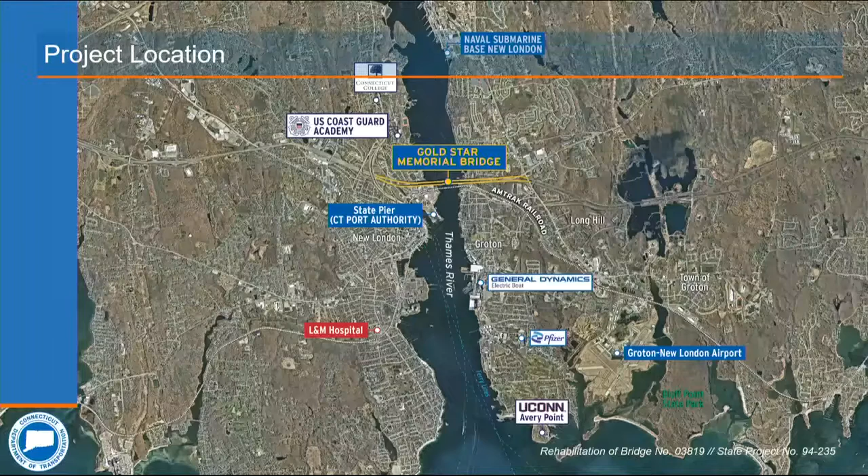Good evening, everyone. Can everyone hear me okay?

Good evening. My name is Emma Covington-Harbron, and I am the project manager from HNTB for the Northbound Gold Star Rehabilitation Project. As many of you are aware, the Northbound Gold Star Bridge carries I-95 northbound traffic between New London and Groton. Along with the southbound bridge, the Gold Star bridges are the only bridges in this area and are a vital link in this northeast corridor, connecting interstate traffic as well as regional traffic within Connecticut and between the two local towns. On the northbound bridge, exit 85 provides access to the town of Groton and points south towards Pfizer, Electric Boat, the University of Connecticut at Avery Point, and the Groton New London Airport. US Route 1 combines with I-95 northbound over the bridge, and also diverges at this exit.

Just past the bridge, exit 86 connects to Route 184 and Route 12 and provides access to the US Naval Base. From the southbound bridge, exit 84 provides access to Route 32 and the city of New London, and to the north provides access to the US Coast Guard Academy and Connecticut College, and to the south, L&M Hospital and State Pier.

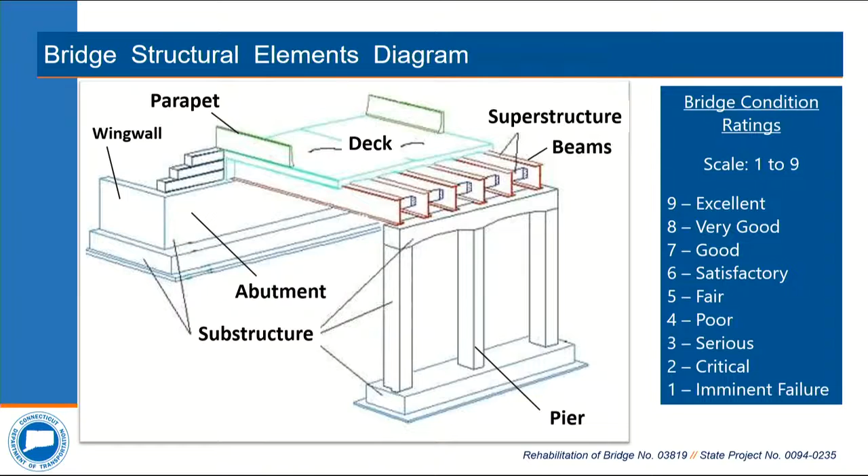Based on the most recent inspection report for the northbound bridge, the existing deck has a condition rating of 4, or poor. This deck was reconstructed in 1975, but given its current condition, it's definitely reached the end of its current service life. In addition, the existing parapet on the bridge, those elements that keep us on the bridge...

...is a 32-inch reinforced concrete parapet with an aluminum fence. This existing parapet is not currently crash tested, and the aluminum fence connected to the parapet is often damaged and is quite difficult to repair. So the parapet and the existing fence will also be replaced.

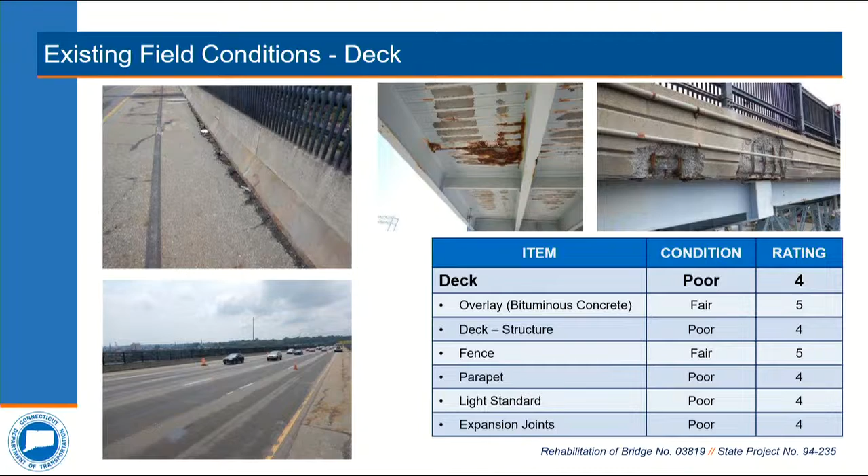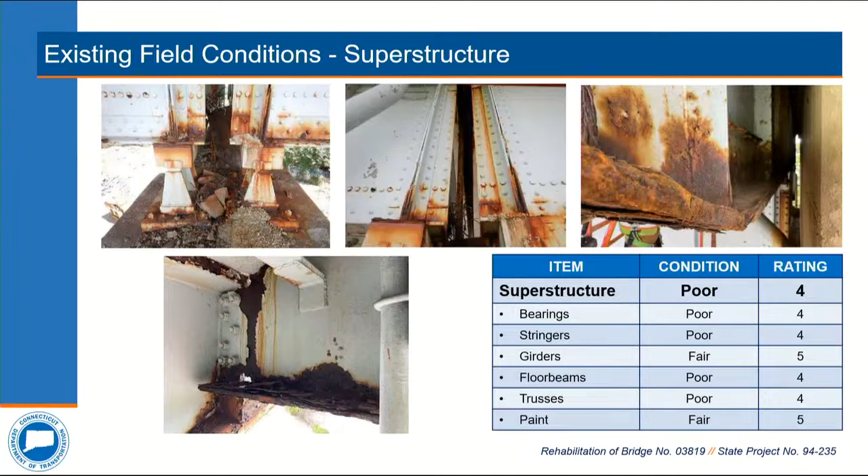The structure will also be repainted as well. That's a big one.

The existing substructure units are original to the bridge construction, so those are also 1940s construction, and they're mainly comprised of two reinforced concrete columns with a cap connecting the tops. They have a condition rating of fair, or 5, and they are subject to minor repairs such as patching.

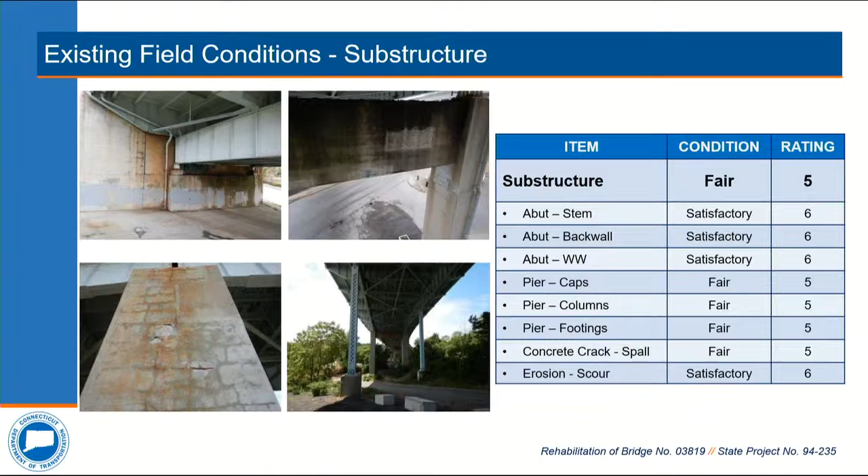The existing substructures are also considered in good enough condition to support or accommodate the steel strengthening and deck replacement work that we'll be doing to extend the life of the bridge, provided that it receives consistent maintenance through the next years of this bridge's life.

So just to quickly summarize the rehabilitation work we'll be performing on this bridge: we'll be strengthening and repairing the structural steel elements in the girder spans of this long structure. We'll be replacing all the bearings in the girder spans and select bearings in the truss spans. We will be doing a full deck replacement, from abutment to abutment, the full length of the bridge. We'll be replacing the deck and all the deck joints.

We will be replacing the existing parapet and aluminum fence with a MASH-compliant 3-rail steel barrier and a stainless steel mesh fence. A MASH-compliant barrier is one that has been rigorously tested to FHWA standards, and it provides superior safety to the bridge.

We will also be doing a full superstructure painting on the bridge. We'll be replacing all the concrete approach slabs, the areas before you get on the bridge. We'll be repairing the concrete substructures, doing that patching work we were talking about, and we'll be installing new light standards and support framing for those, and new overhead sign structures for traffic.

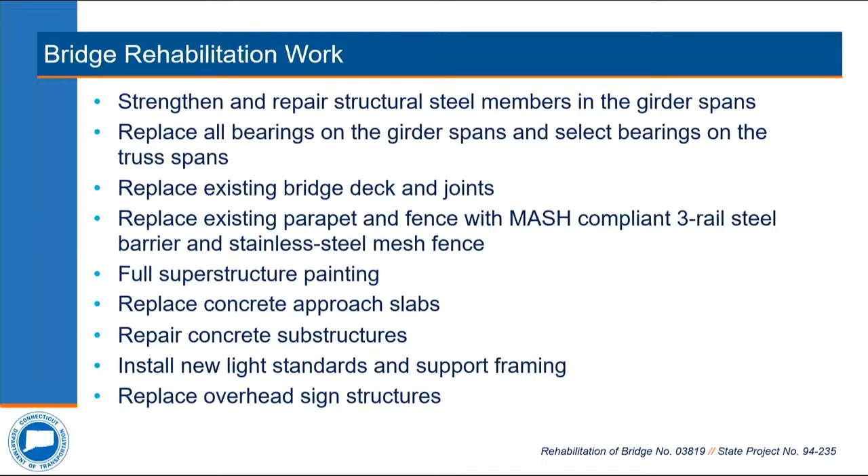I'll now walk you through our proposed construction staging for the rehabilitation work. The construction staging is mainly divided into 2 main stages.

The first construction stage will divert two lanes of I-95 northbound traffic to the southbound bridge, which my colleague Mr. Schweitzer will go into more detail in a few moments. Then 2 lanes of traffic will be diverted to the center of the existing northbound bridge. By diverting those 2 lanes of traffic to the center, it will allow us to start our deck demolition work.

So we'll remove the deck on the north side and the south side of the bridges. Before doing any deck demolition work, we'll make sure that debris shielding is installed to safeguard any structures or any roads that are beneath the structure.

Once the existing deck on the north and south side is removed, we'll then install all our steel strengthening measures to increase the structural capacity of the bridge.

Once the steel strengthening has been installed or the repairs have been installed, we'll then install our new deck through the length of the north and south sides of the bridge, and that will complete our stage 1 work.

When we then go to construction stage 2, we will shift those 2 lanes of traffic from the center of the bridge to the south side of the bridge on our newly reconstructed deck, and we will then demolish the existing deck along the center of the bridge and replace it with our new bridge deck.

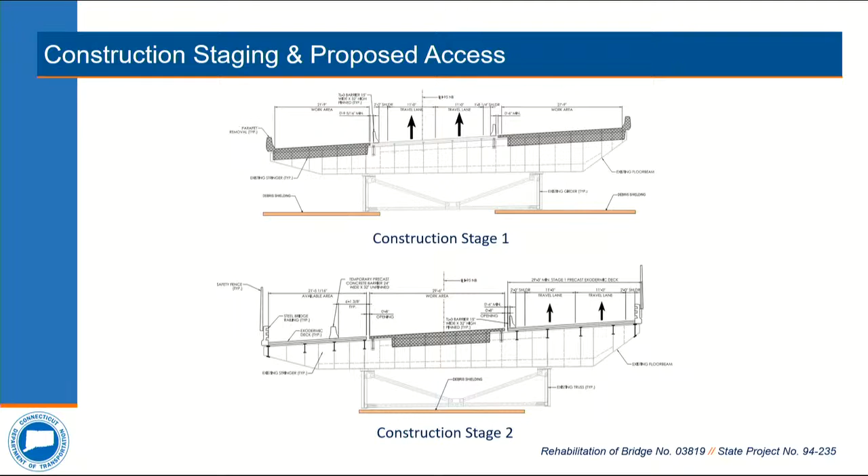And again, debris shielding will be installed throughout the full length of the bridge to safeguard any roads and structures beneath the northbound bridge.

We will do our deck demolition there, on the north and south sides of the bridge, and we'll perform our strengthening measures in those spans first. These spans are primarily the land-based spans, and it's also where most of the structural strengthening work will be happening, so we want to make sure that we get that work taken care of first.

After the deck demo, to complete this work efficiently, we're looking at 4 crews working simultaneously. So if you think about how we divide this work, it's the north and south side of the bridges on the west, and then the north and south sides of the bridges on the east. It's having a crew in each of those areas, so divided into 4 sections.

After the stage 1 deck demolition and steel strengthening is performed, we'll then install the new deck along these same spans. We also anticipate 4 crews working simultaneously there so that we complete this work in the most efficient manner.

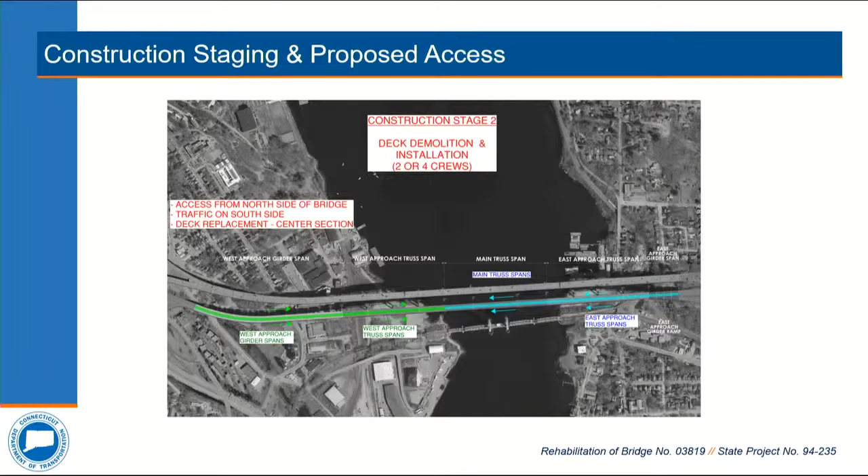We'll have the north side of the bridge, which also has that newly constructed deck that we did in stage 1, to provide construction access. So we hope that the deck demolition and deck replacement along the center of the bridge will go quicker.

We think either 2 or 4 crews could be used to do this work. Either 1 crew working from each end of the bridge and then working towards the middle, or having 4 crews, 1 at each end and then 2 starting the middle and then working towards each other, so that we can complete this deck demolition and deck replacement in a timely manner.

And with that, I will turn it over to my colleague, Mr. Schweitzer.

To the screen, and I'll point as I'm explaining because there's a lot going on here. As was explained, there's a very vital link, both locally, statewide, and regional. So it's important to understand some of the existing conditions out there that help us determine the best and most efficient way to build this bridge and maintain traffic.

Now I-95 is highlighted by the 2 blue lines here. This green dashed line in the center represents the crossover we are proposing, that 2-lane northbound crossover. If you look at the northbound direction, I-95 northbound widens to 3 lanes as it approaches the bridge. Traffic from Route 32 southbound, which also carries US 1, plus local traffic from New London, forms a lane add onto the bridge. That forms the fourth lane, while Route 32 northbound traffic, along with Huntington Street, forms the fifth lane. So we have 5 lanes going across the northbound bridge.

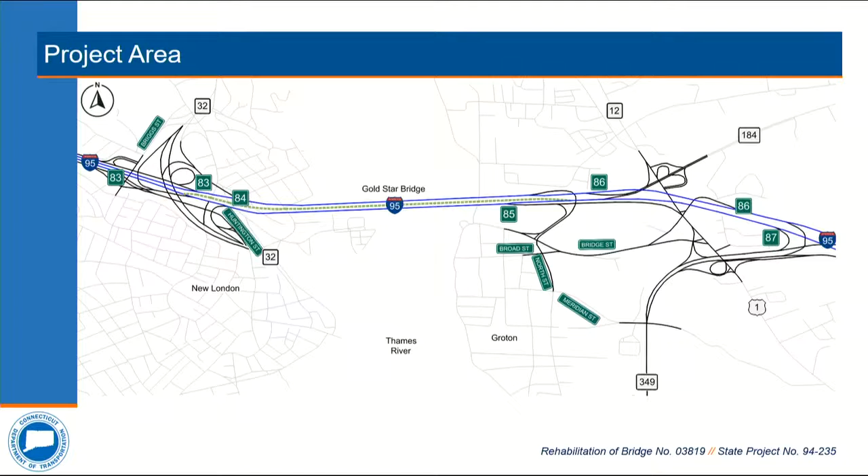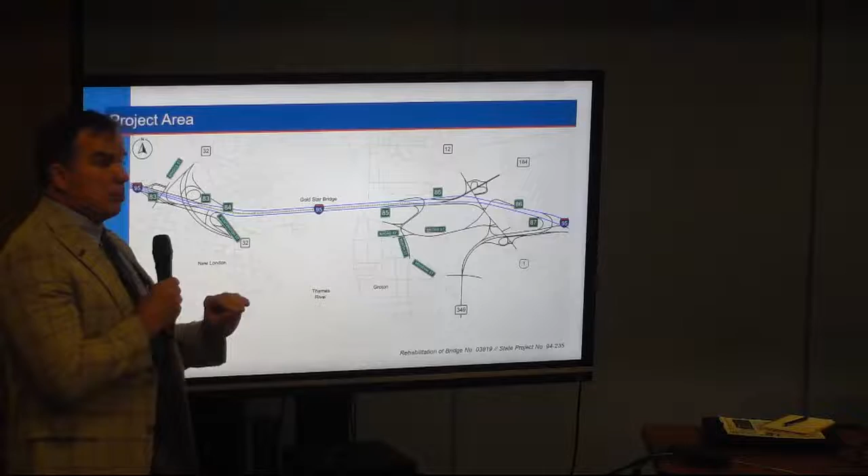On the departure side, exit 85 is a right-hand lane drop that is on the structure. About 1,500 feet off of this is exit 86 to Route 184, Route 12, and points north, which is a left-hand lane drop. What's important to note is that these two lane adds account for about 40% of the traffic on the existing northbound bridge, and exit 85 and exit 86 take about 40% of that traffic off the bridge. So this really is a local connector to get from New London to Groton.

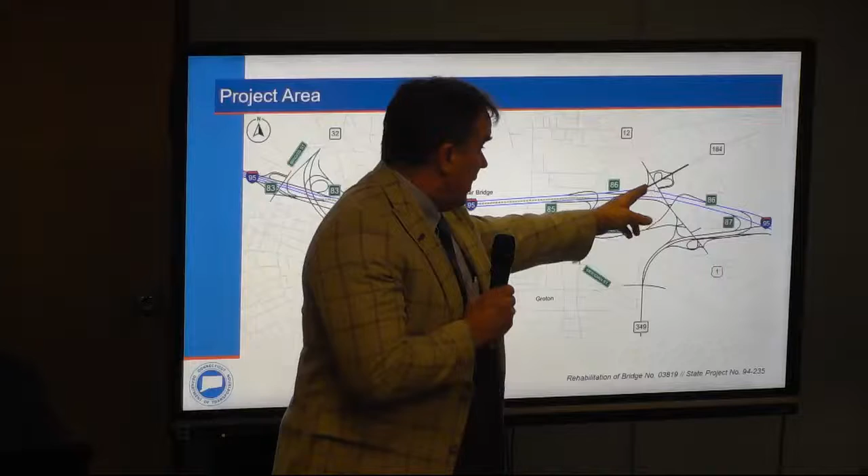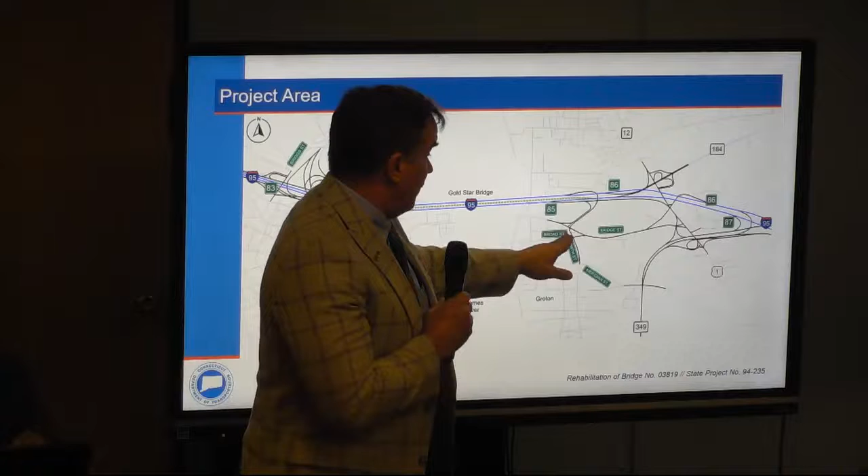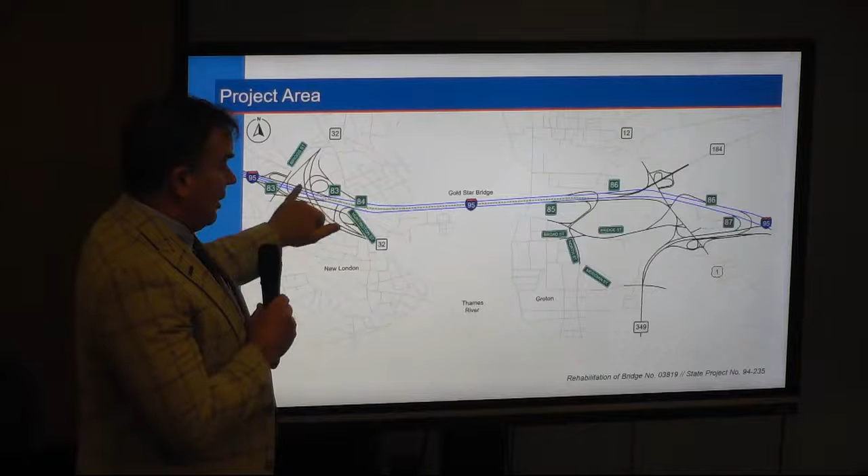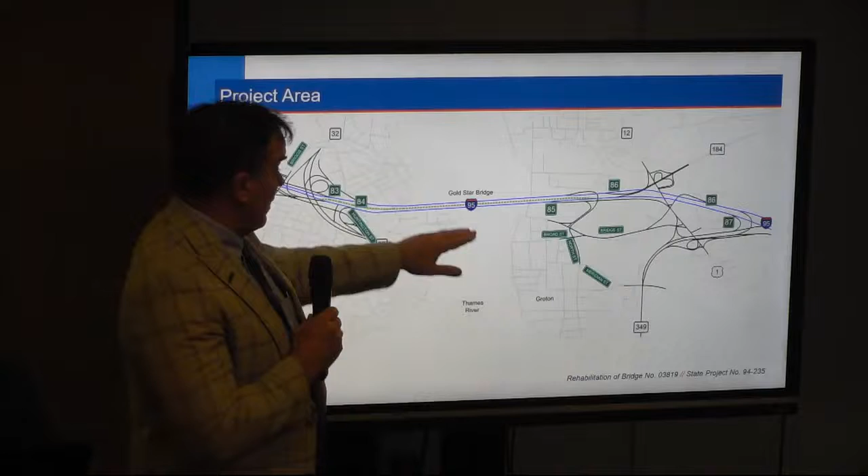On the southbound side, I-95 southbound approaches the Gold Star Bridge with 3 lanes. Exit 86 is a left-hand lane add, giving us 4 lanes, while exit 85, the ramp from Bridge Street and downtown Groton, comes on as 2 lanes but quickly merges to 1. So again we have 5 lanes for a good majority of the southbound bridge, where exit 84 becomes a right-hand lane drop going to Route 32, and exit 83, to the frontage roads and US 1, is also a right-hand lane drop. These 2 exits add just a little less than 40% of the traffic on the bridge, while these 2 exits on the departure side take a little greater than 40% of the traffic off the bridge.

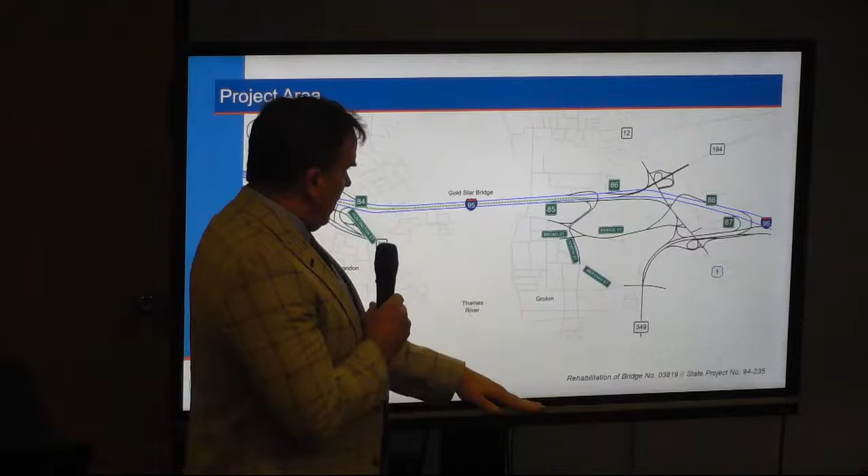Can we go to the next slide, please? So if you look at what we have, at the top are existing conditions, with southbound on the left side and northbound on the right. We're showing something fairly similar, where we have 10-foot left and right shoulders with 5 12-foot travel lanes.

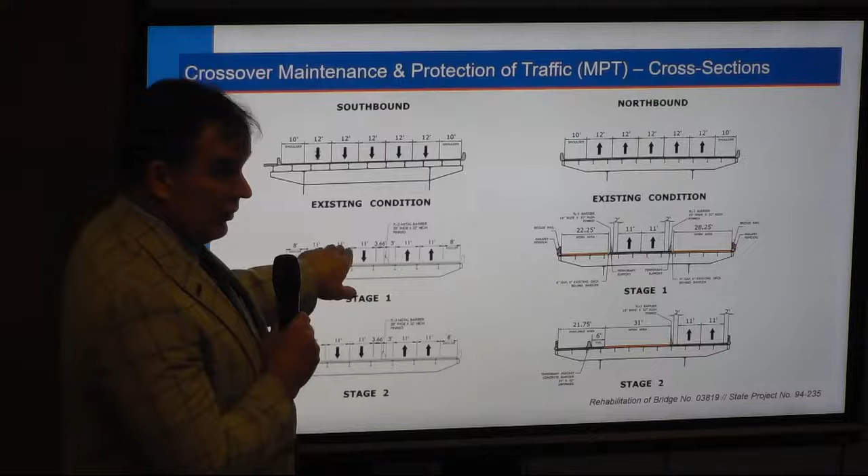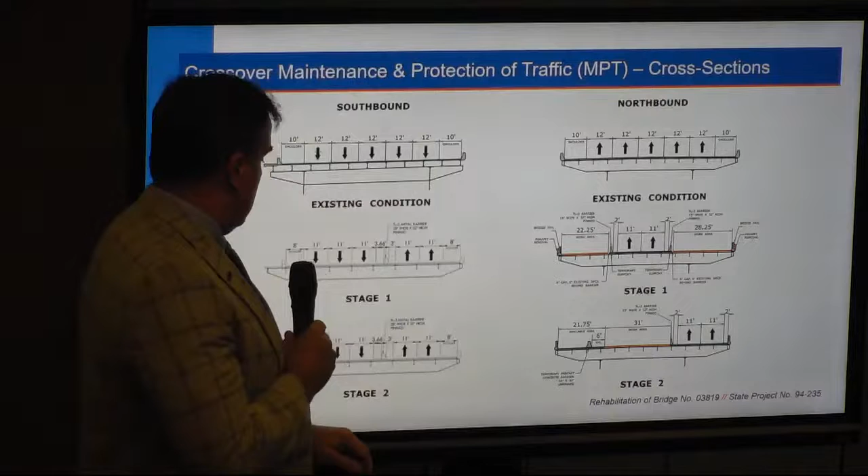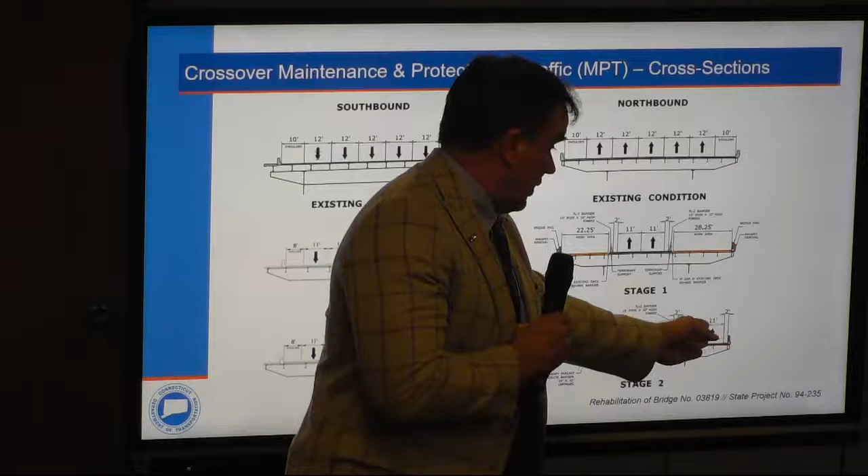What we're looking to do, as was explained, is take 2 lanes of that I-95 northbound traffic and put it onto the southbound bridge. Southbound traffic will be reduced to 3 through lanes. In stage 1, we'll be carrying traffic in the center of the bridge while we work on both outsides. Stage 1 and stage 2 are consistent, we won't be changing any traffic on the southbound bridge. On the northbound bridge, we'll be moving those 2 lanes to the southbound side while the center portion of the bridge is reconstructed.

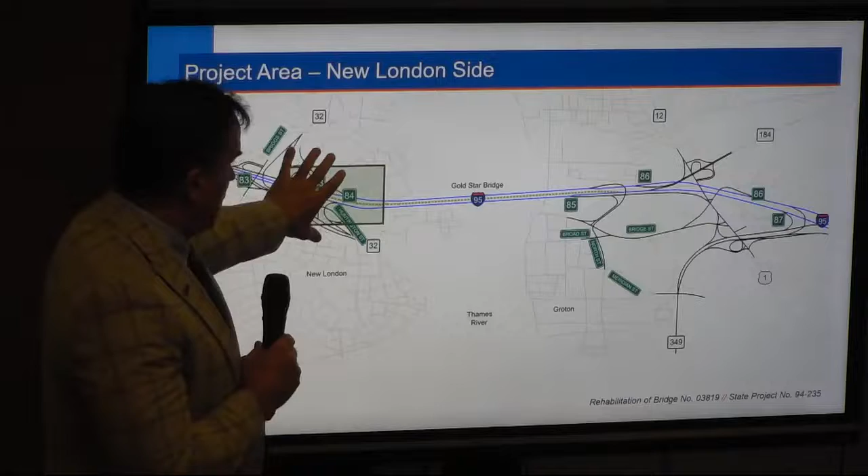So if we look at this, we can get a blow-up of both the approach and departure side. We'll look at the New London side first.

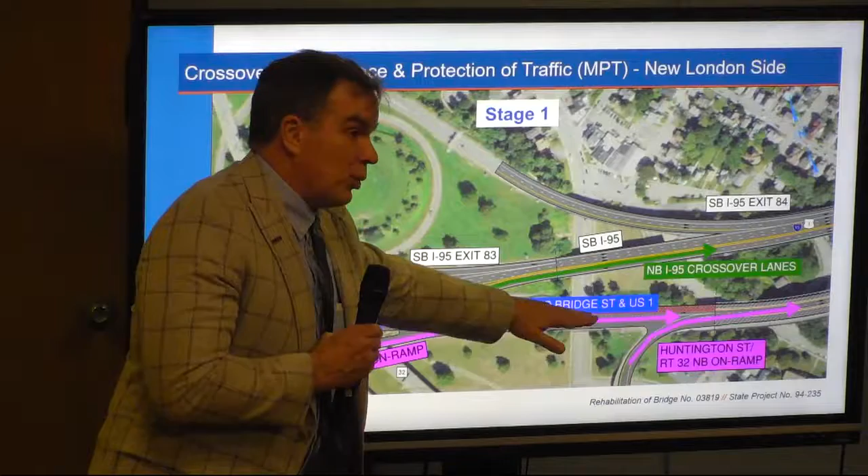So what we have here shows Route 32 running diagonal on the left side, 95 southbound to the top, 95 northbound to the bottom of this screen. These 2 lanes, represented by the green, will be the northbound lanes that cross over. Half a mile to the west, I-95 northbound is only 2 lanes; it widens out to 3. We will not allow that 3rd lane to develop.

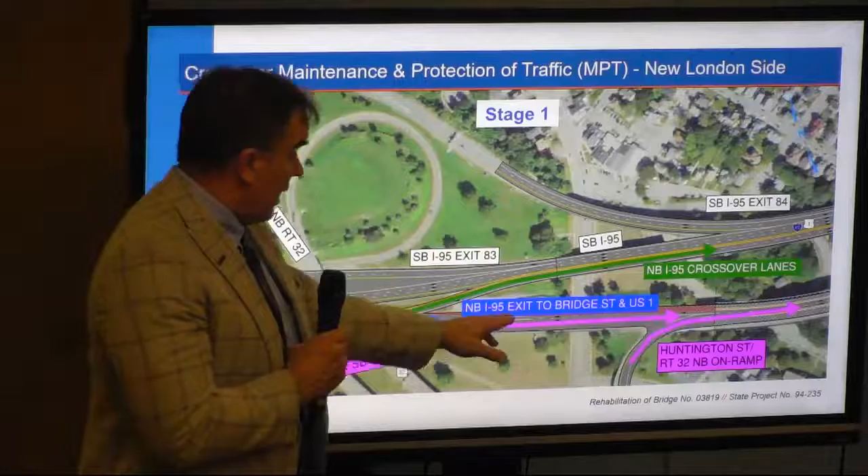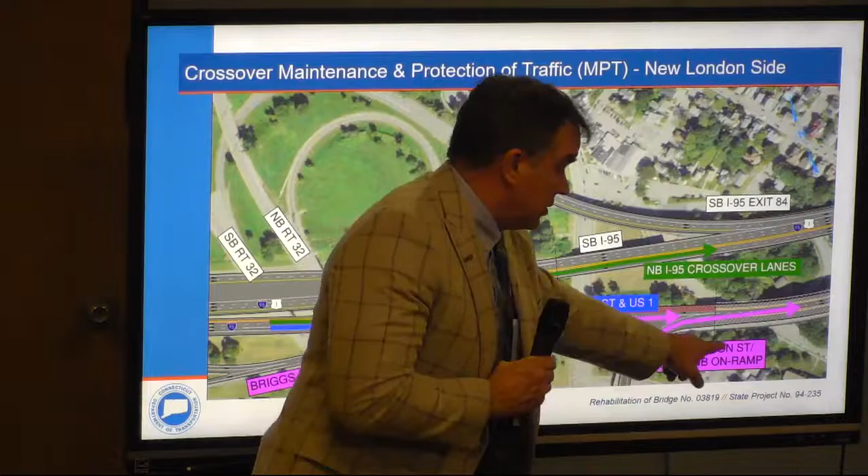So we'll take those 2 lanes of the 95 northbound traffic and put them onto the southbound bridge. We'll provide a slip ramp for 95 northbound traffic that wants to access Bridge Street or US 1, to get to exit 85. The traffic that comes from Route 32 southbound, plus the Briggs Street on-ramp, plus US 1, will merge with this slip ramp traffic and form one of the lanes on the existing northbound bridge. The 2nd lane on the bridge will be formed from Route 32 northbound plus Huntington Street.

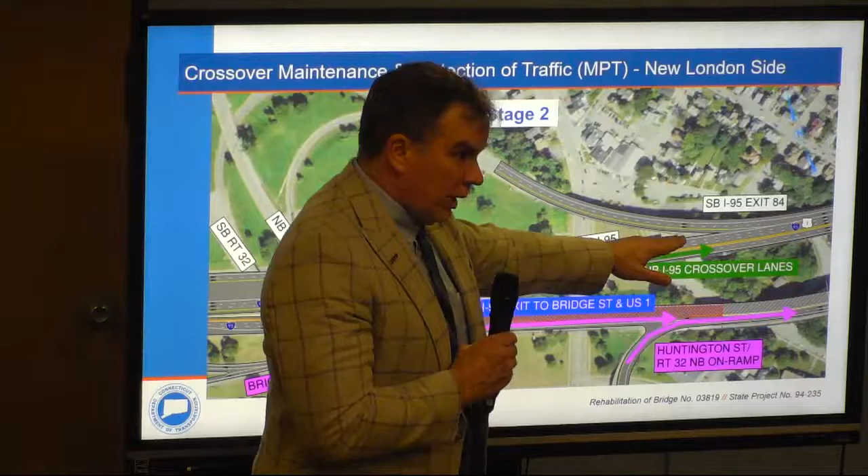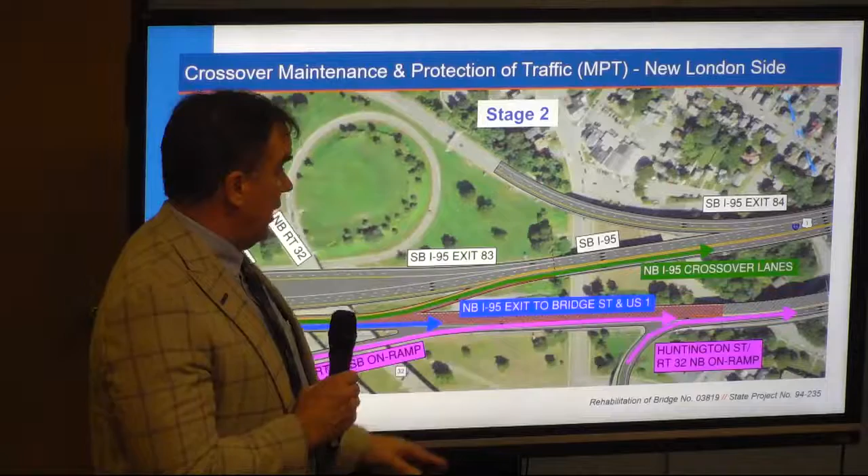So as we look at stage 2, you can see we still have those 2 lanes crossing over to northbound, while we have that one slip ramp coming on to get to exit 85. Our access from Route 32, both southbound and northbound, remains the same, but our traffic has now shifted to the south side of the bridge, while everything remains the same on the southbound bridge.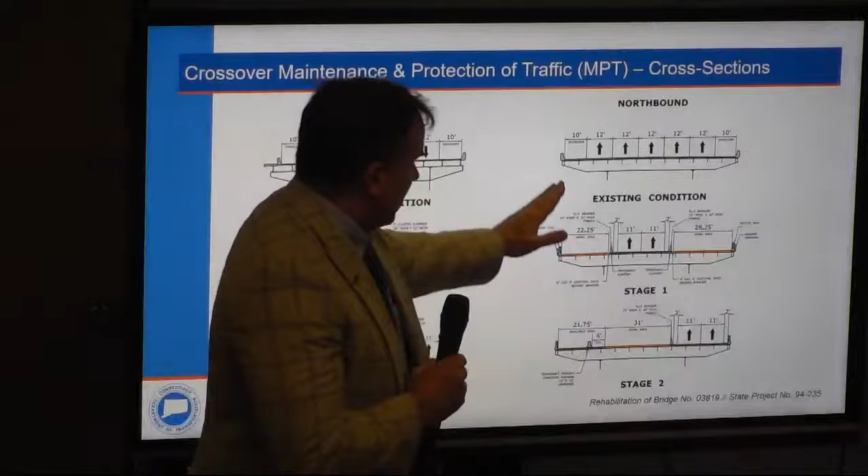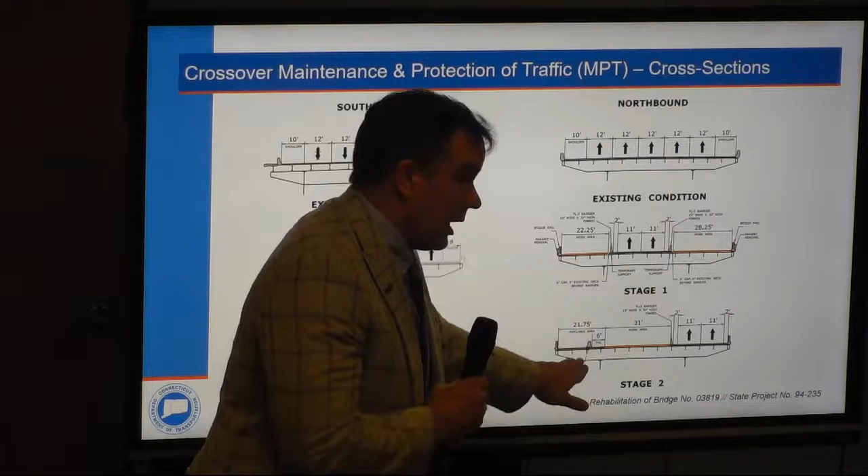This is stage 1. We're working on both sides, driving in the center. Stage 2, we're working in the center, with contractor access to the north side and 2 lanes on the south side.

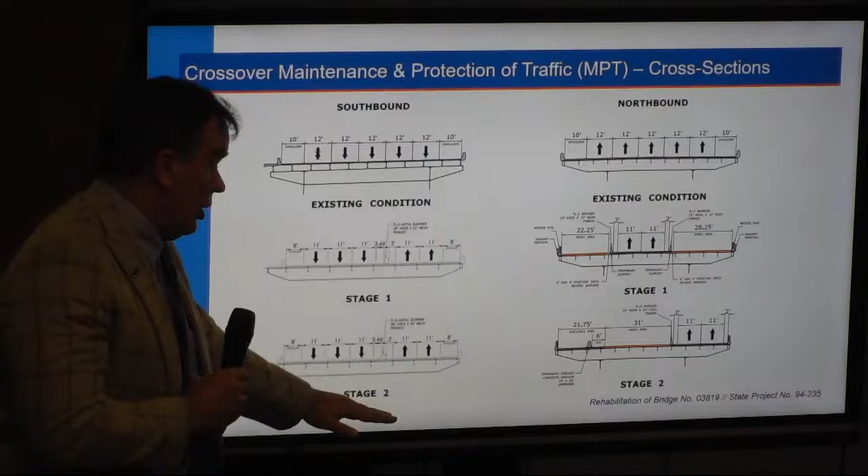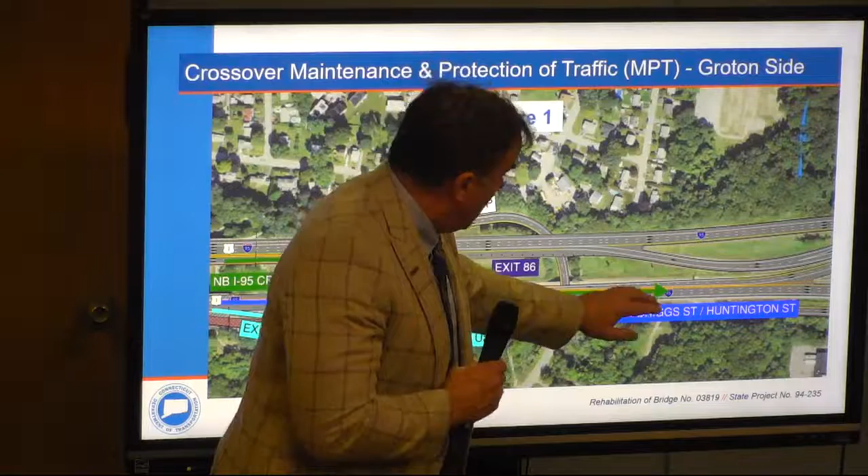Crossover has 2 lanes northbound with 3 southbound, and we remain consistent between stage 1 and stage 2. Now we'll look at the departure side, or the Groton side. This blow up shows the green line, which is the 2 lanes of the northbound crossover coming back onto the northbound, forming the left and center lanes on existing I-95.

Off of this crossover will be the access to exit 86, that left-hand lane drop that goes up to Route 184 and Route 12. That will come off of the crossover.

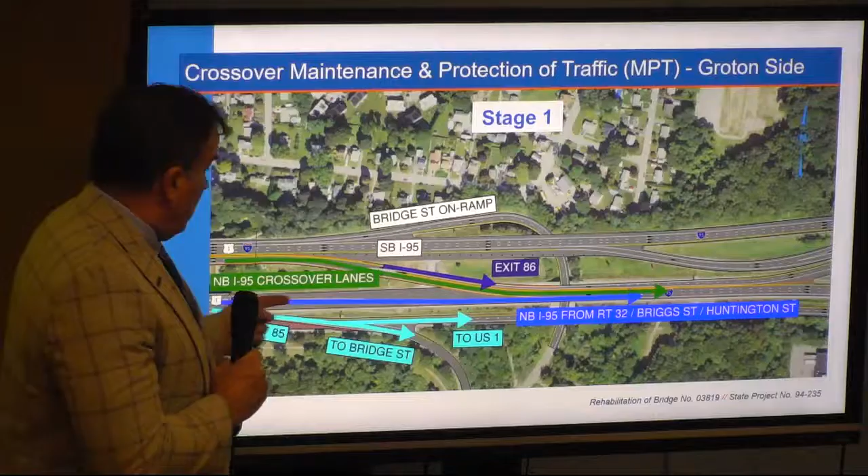On the existing bridge, we have the 2 lanes that will split. One will carry through, so traffic from Route 32 or from downtown New London will have access to I-95 northbound, while the second lane that was on the existing northbound bridge will provide access to exit 85, to both Bridge Street and US 1.

Can you go to the next slide? An important point about this access to exit 85 is that it departs on the bridge, and here is the end of our bridge.

So in stage 1, we're showing it carrying out before we split. We'll build a temporary off-ramp here so we can still access US 1 and Bridge Street while maintaining continuing access to I-95 northbound.

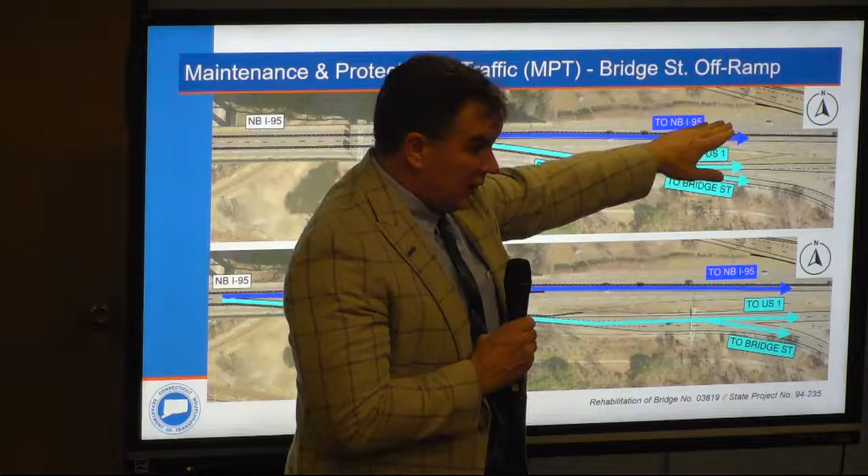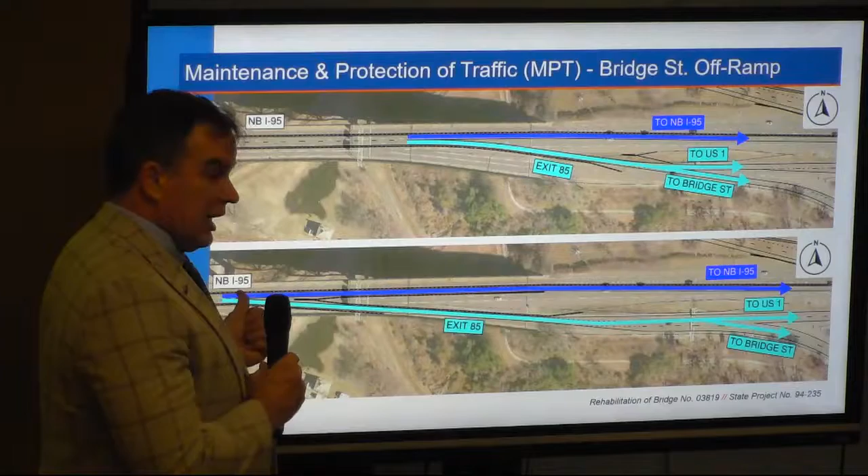But then we want to substage this. So when we're in this stage, we can build this portion of the bridge down in here, as Ms. Heilbronn was explaining. Then we can substage this, so we can exit that traffic off here. We'll move it back — here's the end of our bridge, so we're pushing that diverge point back. We'll still have access to 95 northbound, and then we'll be able to diverge off to exit 85.

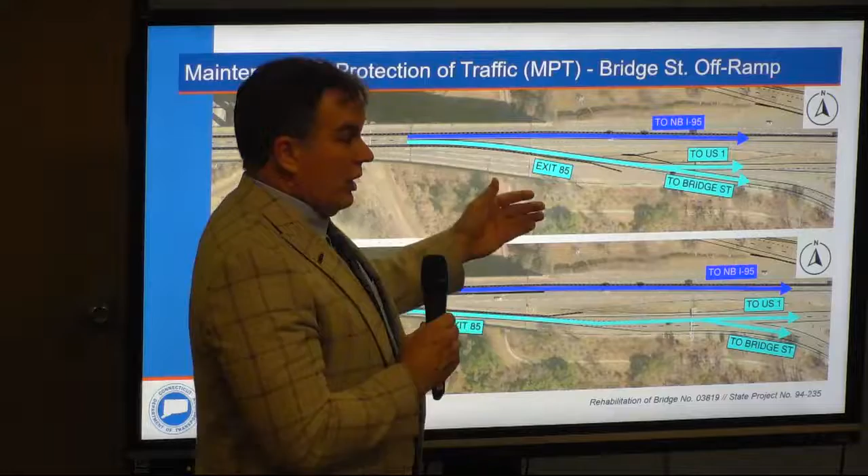What this allows us to do is really limit the amount of closures we need to get to Bridge Street. Because if we were to put in a temporary ramp with that sharp curvature, we'd have trouble making that ramp work. So this substaging really helps us out.

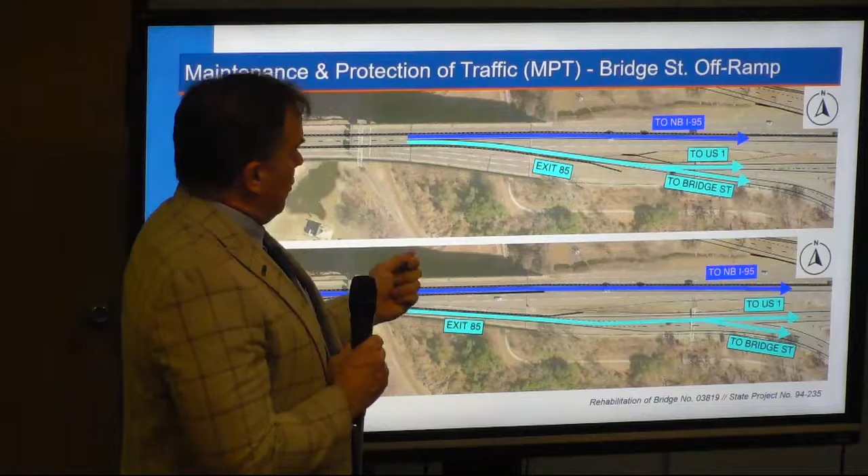Now if we go forward, Shannon — sorry, I keep saying that — let's look at what stage 2 is going to look like. Now we have the traffic on the south side of the bridge, so this ramp will be able to split with access to 95 into Bridge Street and US 1 on the right.

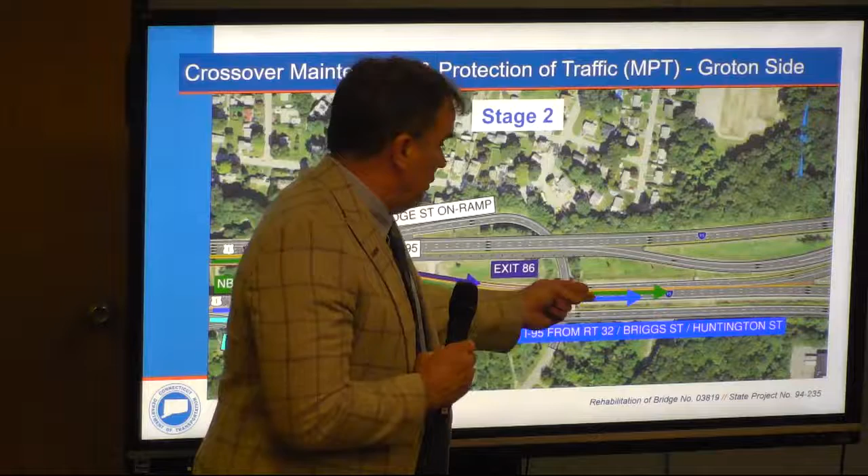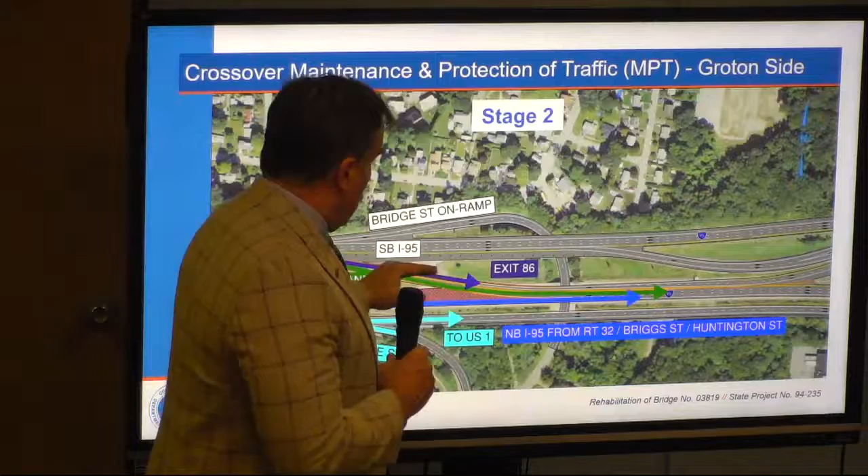These 2 lanes will cross over still, so we'll still form back the 3 lanes with the 2 lanes crossing back over, and this right lane, or the blue line access from the northbound bridge, forming the right lane. This left exit will still come off to provide access up to 184 and Route 12.

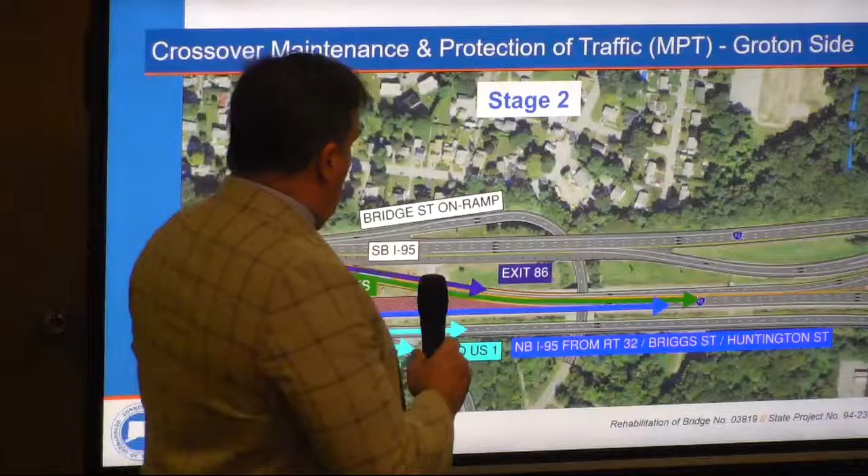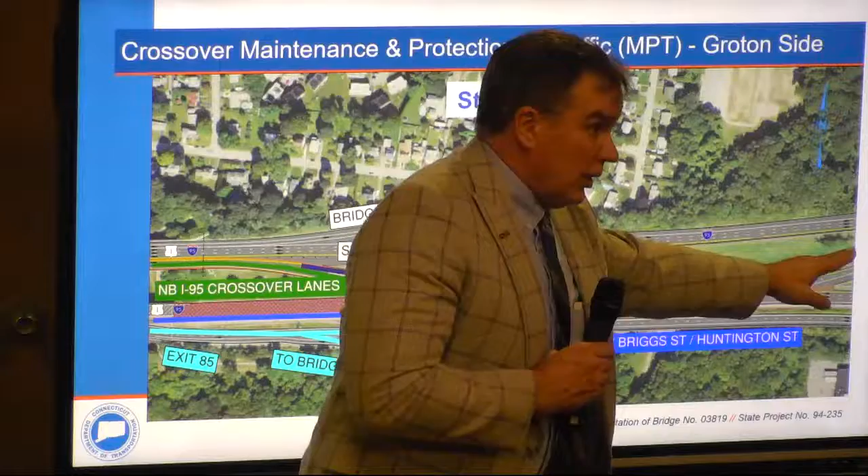Now what's important about this, and this is true for both stages, is this ramp is accessible from I-95 northbound only. If you were on the existing northbound bridge, you will not be able to access this exit ramp while it's under construction. We're going to keep that separated with a barrier curb. It's too short a distance for too many moving vehicles, and it would be an unsafe condition.

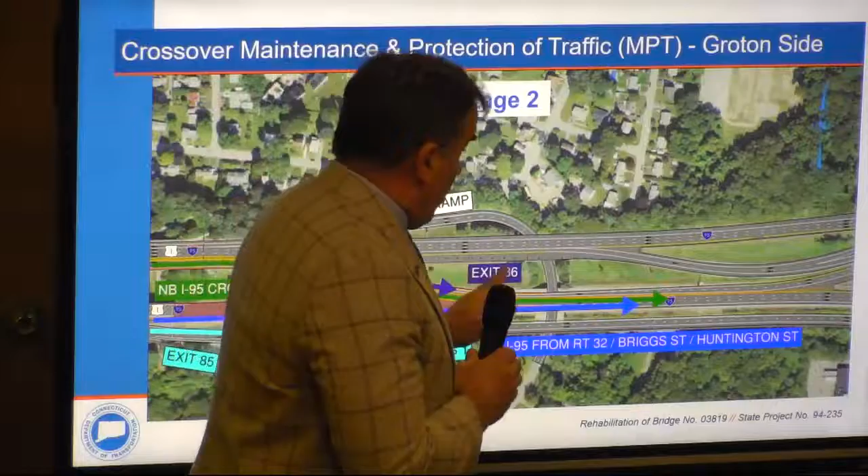So for this movement, for people from New London and Route 32 who want to access here, it'll be one of the detours that we'll be developing. And with that, I'm going to turn it over to my colleague, Mr. Giel, who will walk you through those detours.

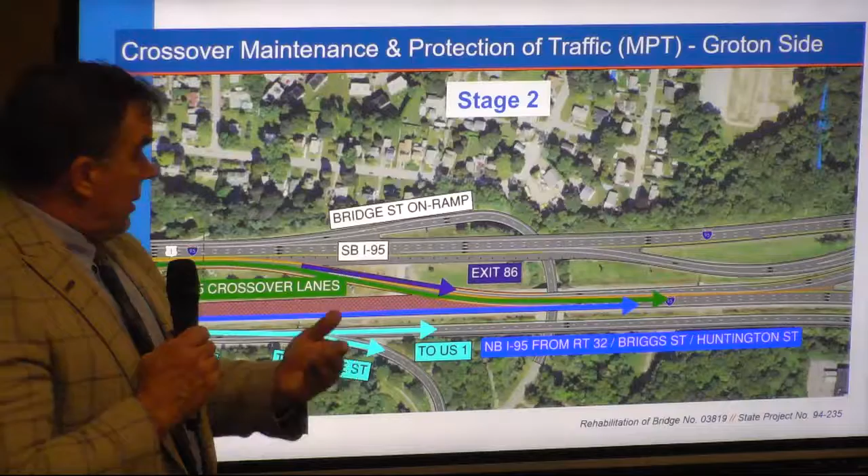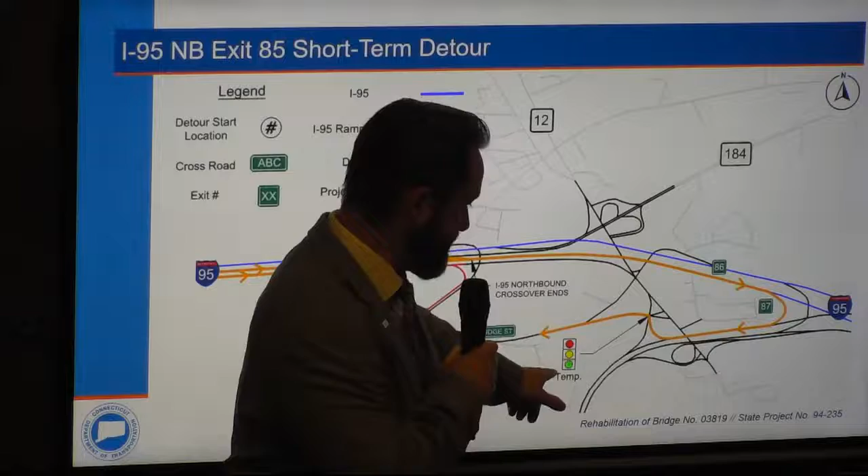As David mentioned, there may be a short amount of time in which we'll need to close the Bridge Street portion of exit 85 in the northbound direction. That's shown here with this red closure identification—again, short-term. If necessary, the idea with this potential detour is to return vehicles to Bridge Street via exit 87 at Route 349. Vehicles can use exit 3 to Bridge Street, turn left at a temporary traffic control signal, and return to Bridge Street. For those continuing south, they'll just continue on Route 349, which provides access to Electric Boat, Pfizer, UConn Avery Point, and even here at the Municipal Center.

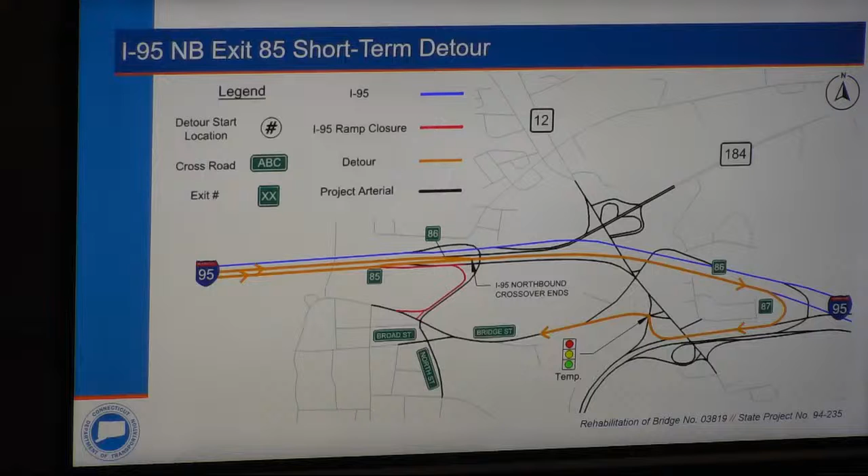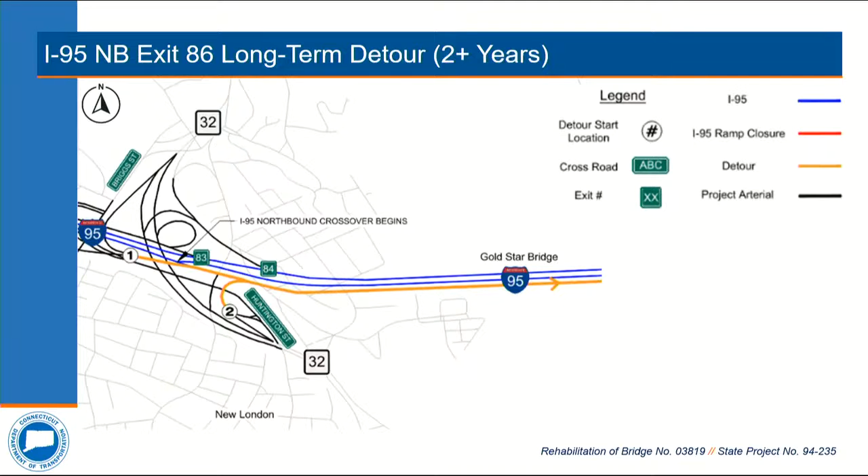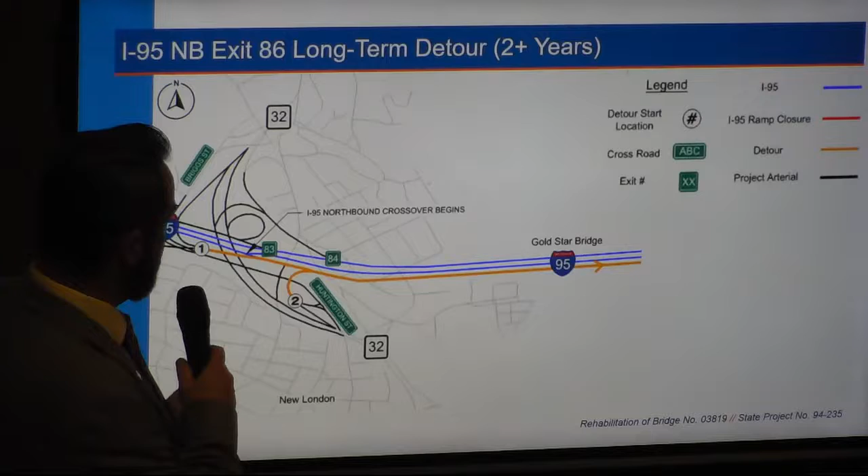As David noted, access to exit 86 will be changed for the duration of the crossover that's in place—specifically the Route 32 southbound and Briggs Street ramp, as well as the Route 32 northbound and Huntington Street ramp. These two ramps, part of the Route 32 system in downtown New London, will carry on the existing northbound bridge structure, continuing similar to the last detour to exit 87.

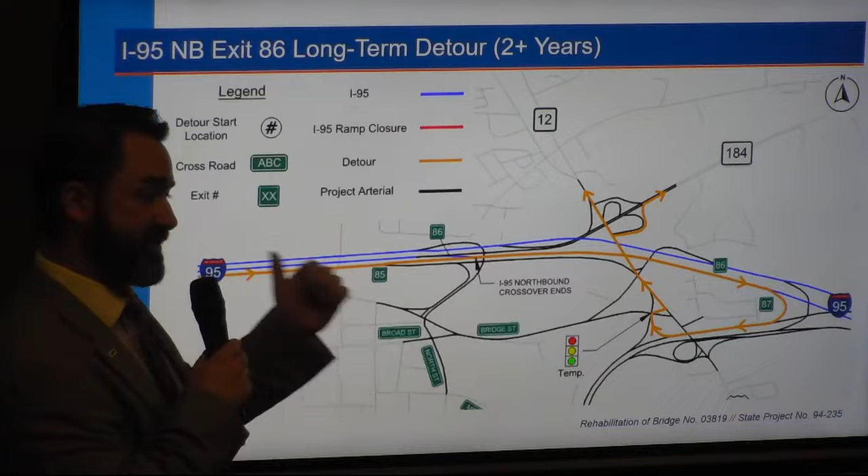From here, again take exit 3 to Bridge Street, and instead of turning left toward the river, you'll take a right to get to Route 1 and Route 12. Take a left and you'll head back to Route 12 and Route 184 to get back to where you planned on going. This will be accommodated with a temporary traffic control signal at the Bridge Street and Route 349 ramps intersection.

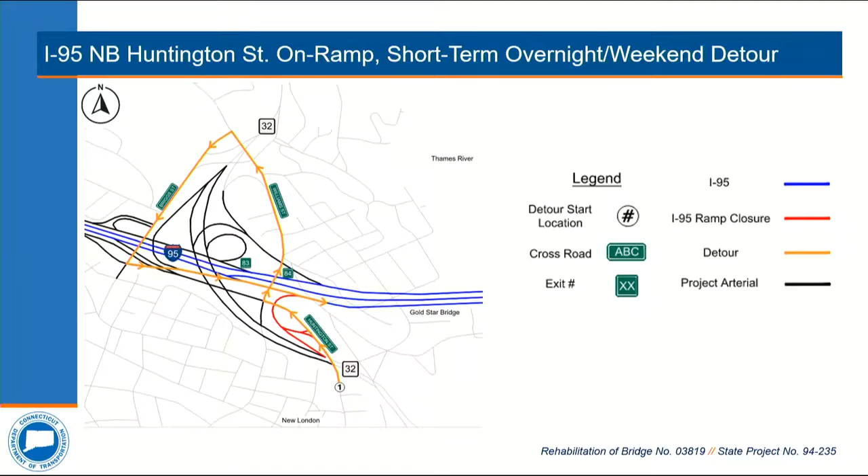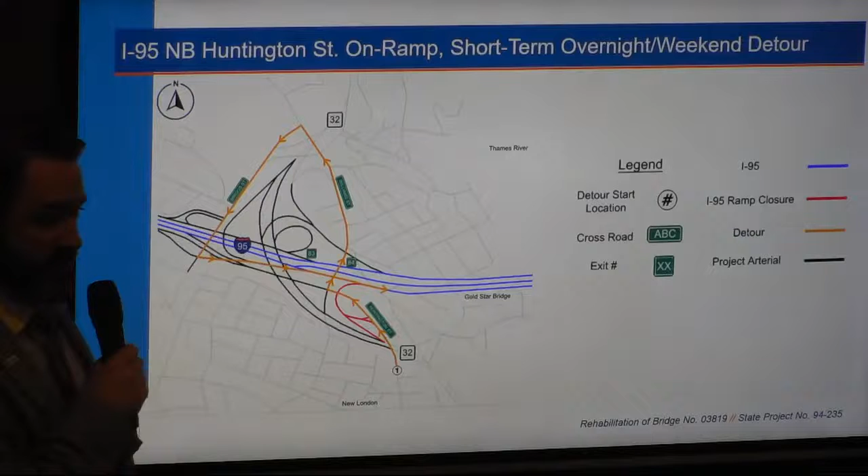On the New London side, there is structure work in the immediate vicinity of the Route 32 northbound and Huntington Street ramp. To accommodate this work, we'll need short-term overnight or weekend detours. In this slide, we show access for the Huntington Street on-ramp: access will be provided via Williams Street to the north, turn left onto Briggs Street, and then return to I-95 northbound via the Briggs Street Route 32 southbound on-ramp.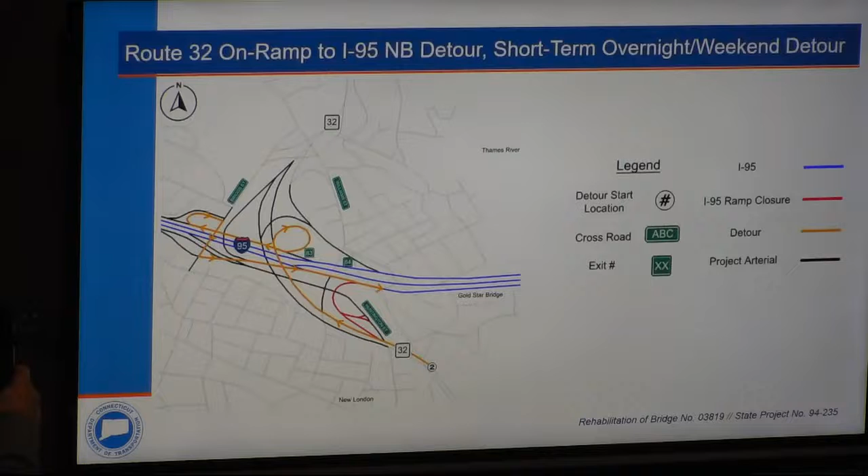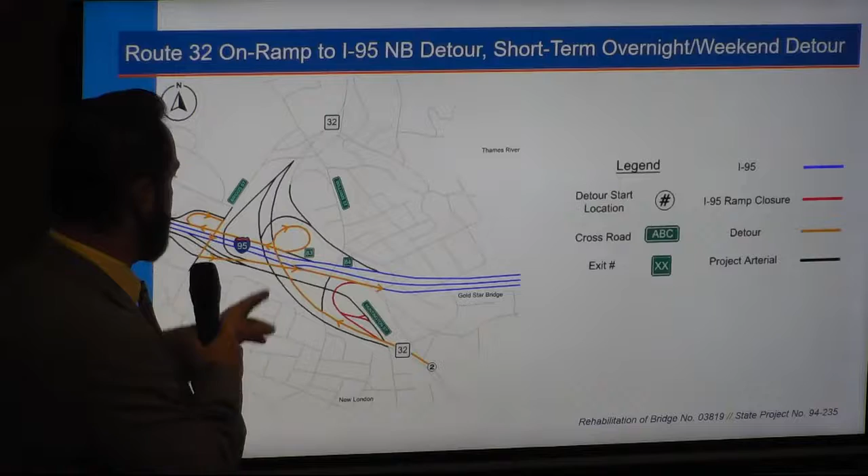From Route 32 northbound in downtown New London, we're recommending a slightly different detour: use the 32 northbound access to the frontage road system, take the frontage road system to Briggs Street, and then return to 95 northbound at the Briggs Street ramp, similar to the last detour. The only difference here is Williams Street versus the frontage road usage.

At this point, I'd like to turn it over to my colleague, Naomi Hodges.

There are important resources underneath this Gold Star Bridge. We have the Thames River and freshwater wetlands associated with it, along with the tributaries that feed into the Thames River. We anticipate only minor and temporary impacts to those wetlands—inland wetlands only. No coastal, tidal, or vegetated wetlands will be impacted by this project. We are not anticipating any in-water work; most of the work will be from the bridge decks and above. However, some work will be needed from barges to access the piers within the river, so there may be temporary impacts to the navigational channel underneath the bridge.

If you are boaters or recreational boaters in the area, you may see some barges out there. We're not anticipating closing the navigational channel, but there will be some barge movements you may see. There is a peregrine falcon nest on the southbound bridge, and there are time-of-year restrictions in place to protect the birds as well as the construction workers, which we are adhering to.

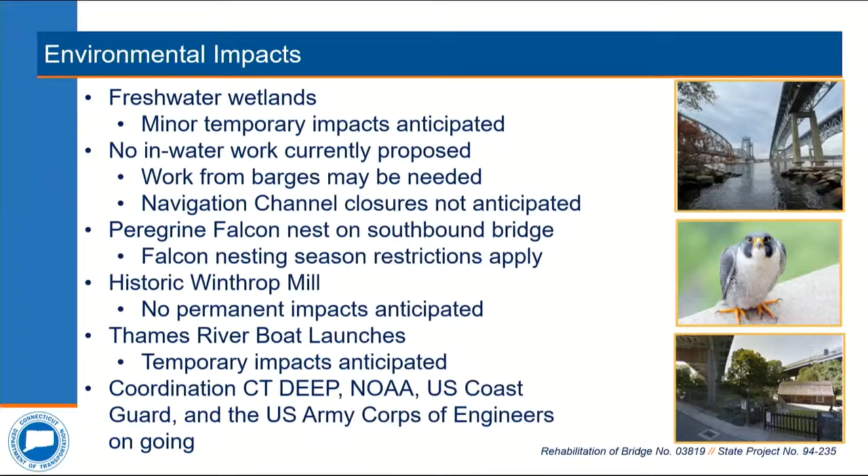We have coordination with DEEP, NOAA, the Coast Guard, and the Army Corps of Engineers in order to get these permits approved. If you go to the next slide, I'll highlight some of the areas where these wetland impacts will be occurring.

On the left side, we have New London. There's a bridge pier highlighted in this area, right about here. We will need to access this area to perform some of the repairs. The impacts will be very minor in that area. What's shown on the screen is not the entire impact area, it's just the entire wetland.

On the Groton side, similarly, there's a wetland in the area between the train tracks. Temporary impacts may need to occur to access that bridge pier and the substructure in that area as well. At the completion of construction, all of these temporary impacts will be restored with wetland grasses.

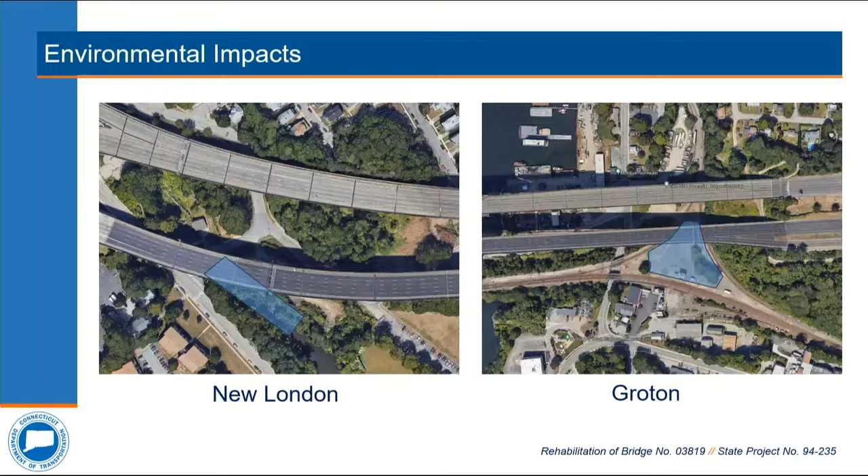As Naomi mentioned, this existing structure spans over 4 different active freight lines. What we see here is the 2 on the west, on the New London side. We're mostly anticipating the impacts to the railroad to be related to our access needs for the project, but we will have to coordinate with their requirements for lifting overhead and also any flagging needs to support the construction of our work occurring over their active lines.

The utility impacts on the New London side are mostly isolated to a couple of pole-mounted utilities that go underneath the bridge. The image shows the Mill Street location, where there are a couple of communication lines. The other location is at Crystal Ave, and in order for us to install our strengthening solutions, we're planning on temporarily or permanently relocating these to avoid any conflicts with that active construction project. So that utility coordination is ongoing.

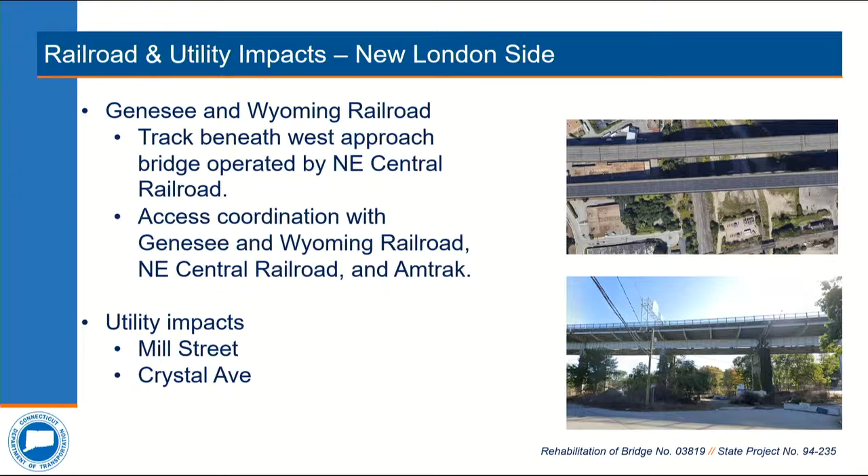So what we're showing here are the potential right-of-way impacts. We are looking to identify potential sites for contractor laydown areas and access needs. There is an active construction project currently at this site that we are investigating as a possible solution for us. There will likely be some local closures to the roads that go underneath the bridge here. This road at Mill Street is currently closed as is.

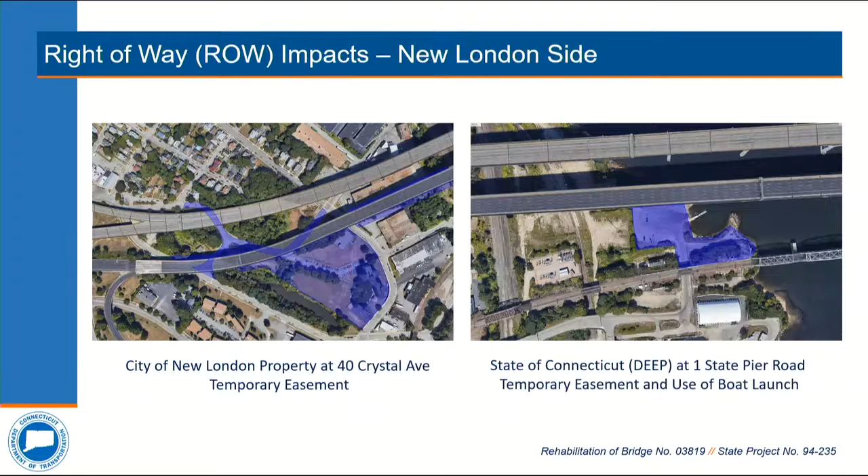There will also be some access needs just along the bridge for our steel strengthening solutions. And as Naomi mentioned, the mill property is shown here with some access there. We are currently anticipating that those longer-term closures of the property for safety would not extend beyond a 1-month duration, and that's really just for those operations occurring overhead.

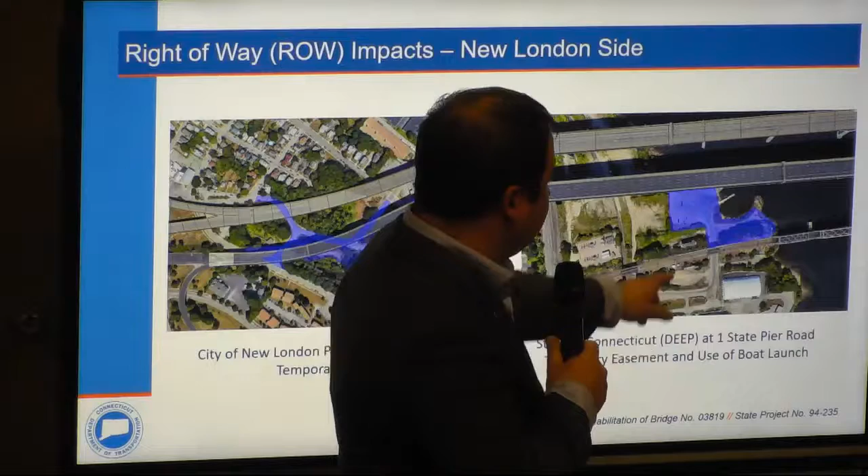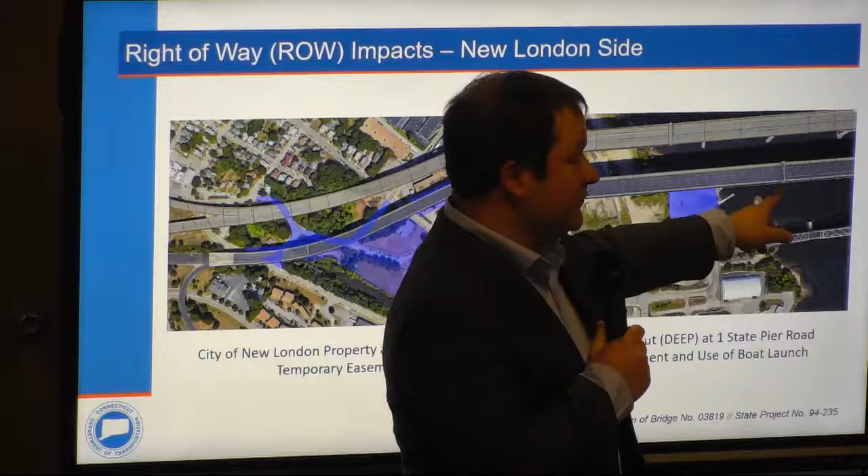On the right side of the screen, you'll see we've highlighted the boat launch area. Right now, we're using that as a potential site for some of our cranes. There's an overhead sign support on the structure that needs to be removed and replaced, so we've identified this as a potential location for accessing that work. And as Naomi mentioned, we'll coordinate with the boat launch on the other side to make sure we keep one open at all times.

Moving over to the Groton side, similarly we have 2 tracks that go underneath the existing structure. We will be coordinating in a similar effort to understand their needs for all of our work and flagging coordination, but also any access needs we have to work within the area beneath the structure and the piers adjacent to the structure. There are no permanent utility impacts currently anticipated on the Groton side, and there are no permanent right-of-way impacts on this side or the New London side at this time.

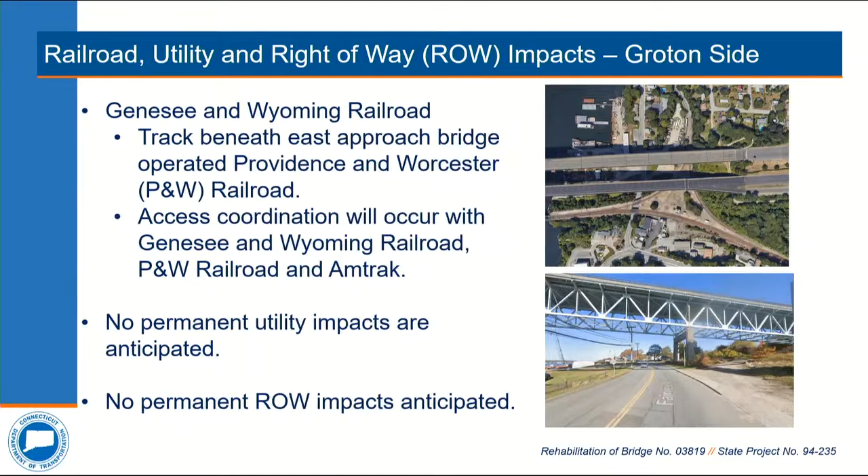Thanks, Nick. Good evening, everyone. I'm Matt Giannakopoulos, a project coordinator with the department's Division of Rights-of-Way. It's our office's responsibility to acquire the property rights needed for transportation projects. As Nick just outlined, the proposed project may require the acquisition of some temporary construction easements, a property right that gives a contractor the ability to use private property or city property for activities related to the project.

So because of that, I'm here tonight just to give a very brief overview of the department's acquisition process.

Any property rights or construction easements necessary for the project will be acquired under Connecticut General Statute sections 13A-73, 13A-98E, and whenever there is federal money used in any phase of a project, the department must adhere to the Uniform Relocation Assistance and Real Property Acquisition Policies Act of 1970.

Once the design is a little bit further along and the department knows exactly what rights it needs to build the project and we're ready to begin the acquisition process, each impacted property owner will receive a letter of intent to acquire from our office along with a property map which depicts the exact limits and the rights to be acquired. We then determine the fair market value of those rights, and we use that to establish an offer of just compensation.

That offer is then sent out to the property owners in writing, and a right-of-way agent from our office is available to meet with the property owners to answer any questions and explain in detail the project, the impacts to that owner's particular property, and explain how the state came up with the offer.

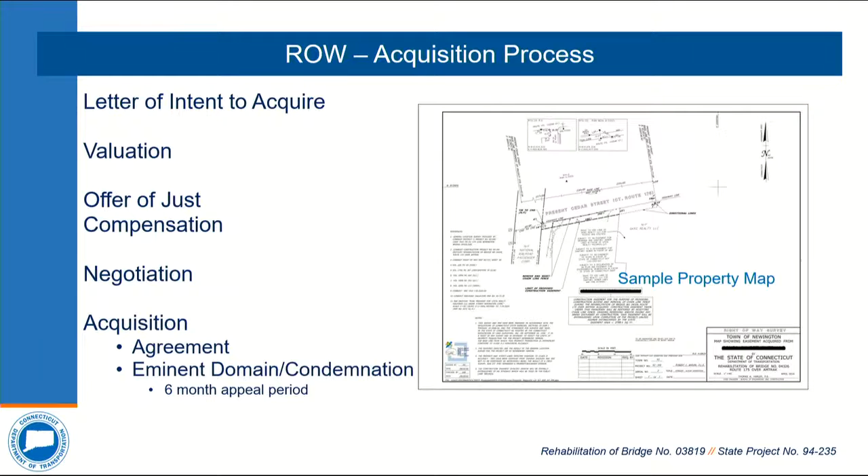Thank you, Matt. Next slide, please.

Based on the preliminary design, the current estimated cost for construction is $591.9 million. The Connecticut DOT was awarded a $158.2 million grant through the Federal Bridge Investment Program. We're going to use a small portion of that to cover the rest of the design effort, but the bulk of it will be put towards the construction cost. The remainder of the construction cost will be covered using 90% federal funds and 10% state funds. No municipal funds are to be used for this project.

Based on the current schedule, this is assuming that we get all permit approvals in time and temporary easements are acquired in time. We're anticipating that the final design will be completed this December. This is an accelerated design schedule, and it'll go out for advertising in February 2025. Now, based on typical timeframes, we are thinking that construction will start in summer 2025 and be completed in the fall of 2029.

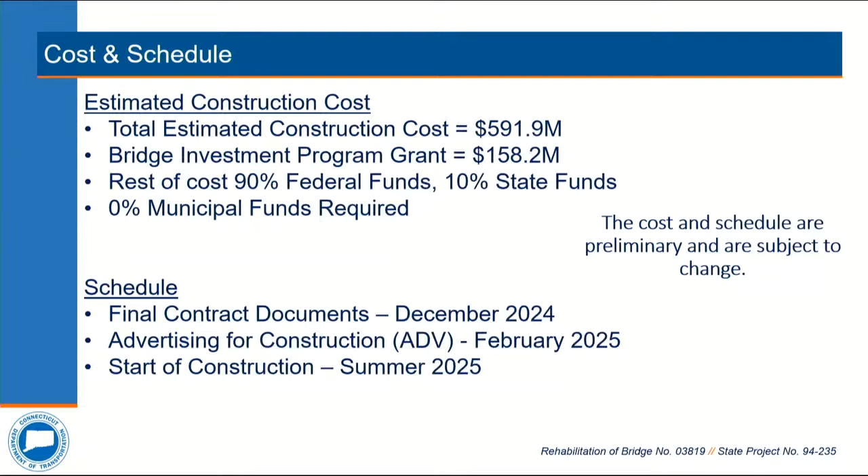As the team mentioned earlier, one of the overall goals of this project is to increase the structural capacity of the Gold Star bridges so that oversized, overweight vehicles are able to cross the Thames River using I-95. Currently, the oversized, overweight vehicles are detoured to the bridge upstream to the north that carries Route 2A over the Thames in Montville and Preston, which adds another 17 miles to their trip.

In order to meet this goal, the southbound Gold Star Bridge also needs to be strengthened so that these permit trucks can start crossing the bridge again. So the department has initiated another project, Project 94-268, which will be primarily to do steel strengthening on the southbound bridge, which consists of two bridges, bridge number 2514A and B. B is the ramp bridge at the exit.

So the scope of this project includes, as mentioned, steel strengthening on most of the components, the stringers, girders, in most of the spans on the bridge. It also involves condition repairs, and this is to address areas where there's advanced deterioration, and it'll bring up the condition to a satisfactory level. They will also do localized painting at those repair locations.

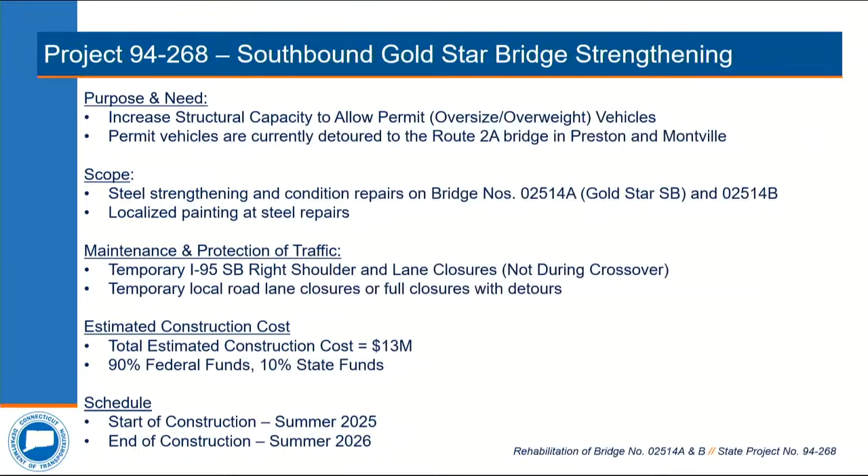Lastly, the estimated construction costs associated with this is $13 million, and that will also be funded with 90% federal funds and 10% state funds.

Before we move on to the Q&A session, we just want to thank you all for taking the time this evening to listen to our presentation and hopefully give your comments and questions to us. The Gold Star bridges are a vital link between communities in New London and Groton, and these repairs are definitely needed to ensure that the bridge remains a safe crossing and can safely carry all the vehicles, the 60,000 vehicles per day on each bound that typically use it.